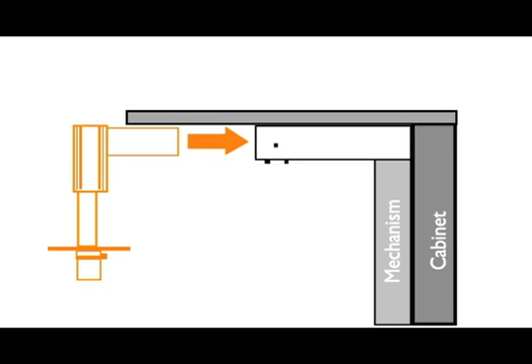Segment 5, Head Assembly and Chair Installation. After the back panel and countertops are installed, the head assembly is inserted into the mainframe. Take care not to scratch the paint when the head assembly is placed into the mainframe. Slide head into frame till it's 1/2 inch from the countertop edge.

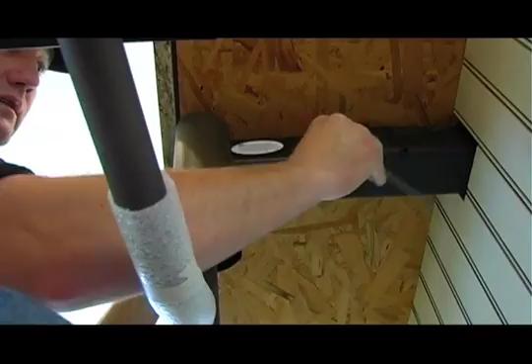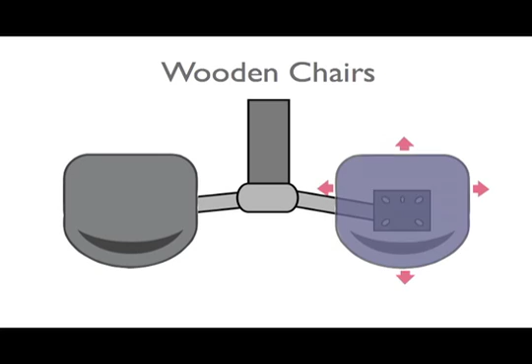First, tighten the corner set screws to position the head assembly. Next, tighten the side and bottom set screws to secure the head assembly. Center the chair on the seat plate and screw the chair onto the seat plate. Offsetting the chair a maximum of 1 inch from center may be acceptable in accommodating chair spacing problems on wood chairs. Metal chairs are centered on the seat plate.

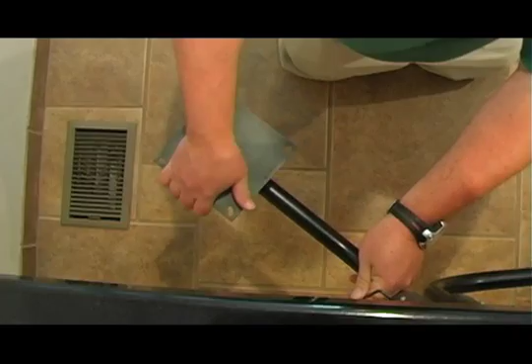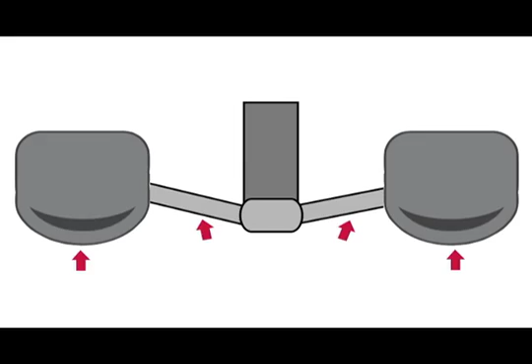Suspension arm alignment. In general, the suspension arm is positioned so the center of the seat plate is directly aligned with the edge of the countertop. The suspension arm can be positioned away from the countertop to provide added room for adults. The suspension arm can be positioned inward to provide more room to pass if the chair protrudes into a walkway. The resting position of the suspension arm is preset at the factory for straight bars.

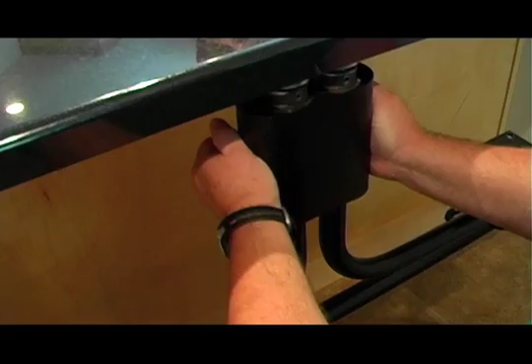Note: positioning the suspension arm inward may negate the effect of the seat plate stop that prevents the chair from colliding into the countertop. To realign the suspension arm, flex the cover outward and pull down to remove the cover. Locate the lower collar and loosen the 4 set screws. Once the lower collar is loosened, the suspension arm can be rotated to the desired position and the set screws retightened. Note: place downward pressure on the chair while repositioning the suspension arm.

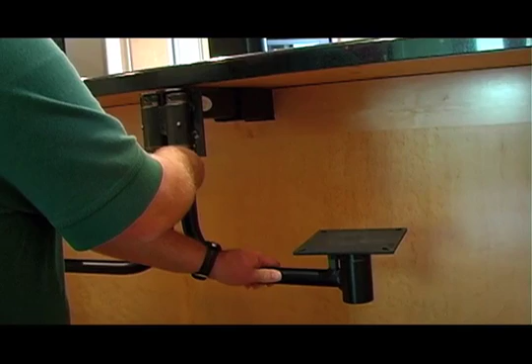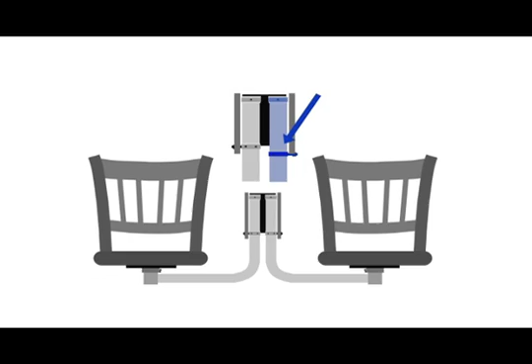The spring in the suspension arm will cause the arm to rise, pushing the lower collar up on the arm, and will create added play or it may bind the mechanism. The chair can be realigned by adjusting the seat plate rather than unscrewing the chair and repositioning it on the seat plate. Loosen the 2 set screws on the seat plate collar. Rotate the chair or seat plate to the desired position and retighten the set screws.

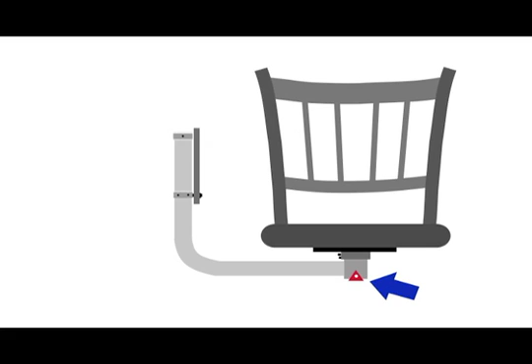Return spring adjustment. The suspension arm and the seat plate are spring-loaded to return the chair to its resting position when not in use. If the chair does not return itself, the spring may need tightening. To tighten a seat plate spring, take a pair of vice grips and grab the torsion key located under the seat plate. Carefully pull down on the spring-loaded torsion key and tighten 1/4 turn. The seat plate should now return to its resting position.

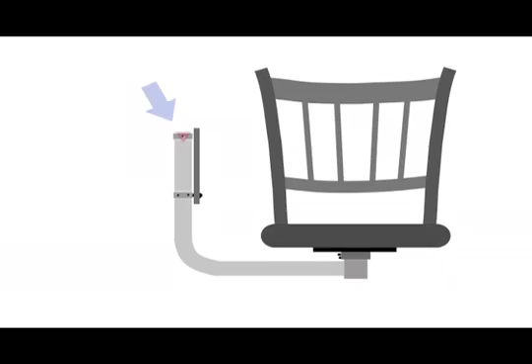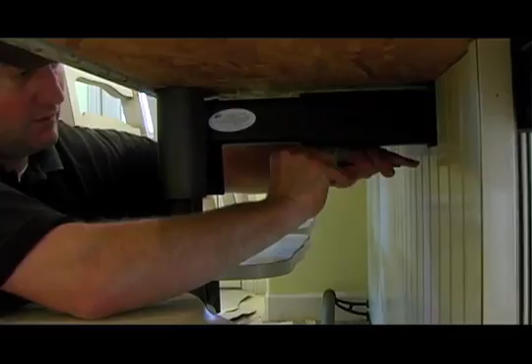To tighten the spring in the suspension arm, loosen the set screw on the cantilever. Slide the head assembly back to clear the countertop. Take a pair of vice grips and grab the center of the torsion key. Carefully pull up on the spring-loaded torsion key and tighten 1/4 turn. Slide the head assembly back into the cantilever frame and tighten the set screws. The suspension arm should now return to its resting position when pulled back. Note: to tighten a right suspension arm, turn counterclockwise. The left suspension arm is tightened by turning clockwise.